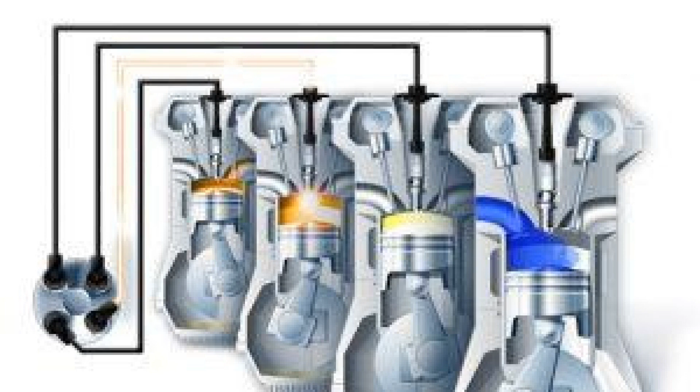Due to abnormal, i.e., early or late ignition of the fuel, the cylinder is subjected to a kind of explosion. But how do you set the ignition and avoid severe shock loads when the piston is somewhat displaced from the center, striking the cylinder walls? As a result of detonation, the edges and working plane of the valves, as a rule, melt and burn through. This phenomenon is closely related to the requirements of setting the ignition advance angle.

This means that in one revolution of the crankshaft, it is necessary to provide the spark so that the combustible mixture has time to burn completely. Combustion of a mixture, for example gasoline-air, occurs from the spark plug spark supplied to the combustion chamber.

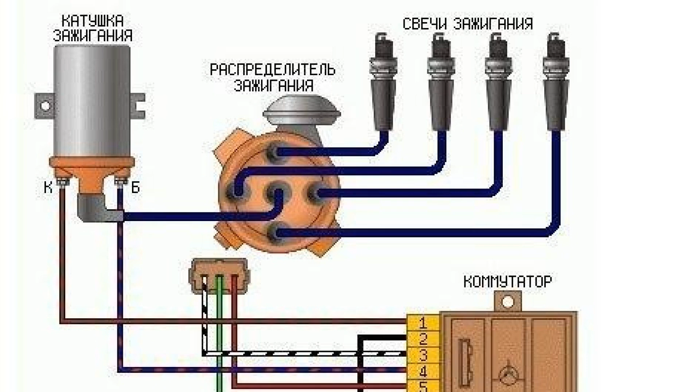This occurs at the moment when the piston reaches the compression stroke, i.e. TDC. The matter is the huge speed of rotation of the crankshaft. In an instant, the piston passes the way, pushing from the moment of ignition to move downward under the influence of burnt gases.

If ignition occurs when the piston reaches TDC, combustion will occur at the beginning of the stroke. This will cause the pressure of the gases to decrease. But if ignition occurs before it moves upward, there will be a counteraction to its movement.

System design: the ignition system is oriented to supply a spark discharge to the spark plugs in time with engine operation. There are variants of contactless and electronic systems, identical in the way of creating a pulse. To have a superficial notion of how to set the ignition, it is not unreasonable to know about its main elements: power source, battery, necessary for starting the engine, and the current generator to run the car.

The ignition switch, designed to supply voltage to the electrical system. Ignition coil, which converts the battery energy to 30,000 V, enough to create an electrical discharge between the electrodes of the spark plug. Spark plugs are a metal conductor with an outer insulation of heat-resistant porcelain. The second electrode is the threaded part of the plug.

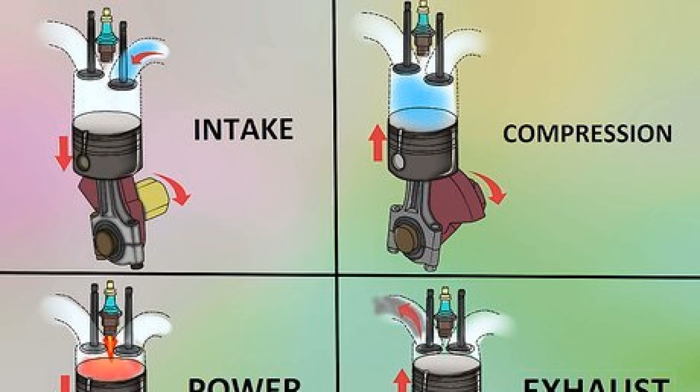It should be remembered that the ignition setting is the need to burn the fuel mixture without residue. This means that it must be fed and burned when the piston reaches TDC. Incorrect setting of the ignition timing is sure to lead to detonation of the cylinders with all the ensuing consequences.

The order of installation. The question arises: how do you set the ignition? So, we have learned that the ignition of the mixture should occur when the piston reaches TDC. This moment is determined by the position of the crankshaft.

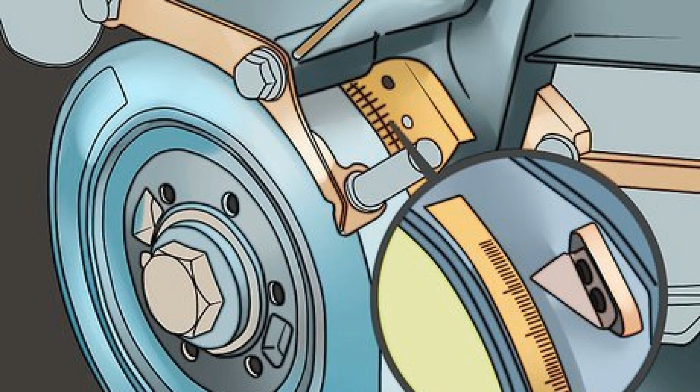We are talking about the position, in degrees, of the crankshaft relative to TDC. If there is an offset toward TDC, this position is called late ignition. Displacement towards BDC is called early ignition timing. The value of the latter directly depends on engine speed, so at high shaft speed, the early ignition timing is set.

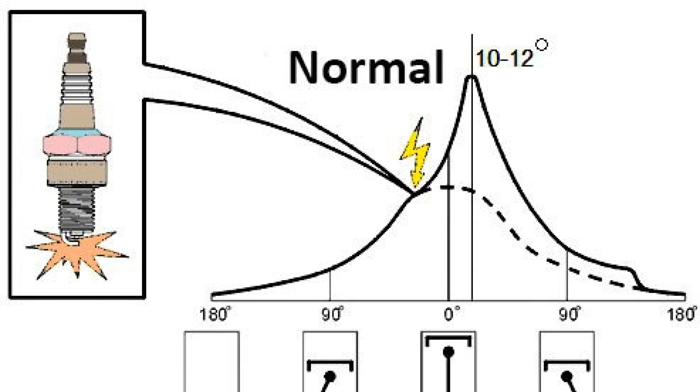The procedure for setting the ignition on a car is much simpler than its verbal explanation. Without going into subtleties, put the car, for example a VAZ2105, in neutral with the handbrake engaged. Remove the distributor breaker cover and rotor, then turn the crankshaft with a special wrench until the slider points to the first cylinder. Visually check the position of the factory marks and castings on the pulley and front cover - their coincidence is extremely important.

Before setting the ignition on your car, check the serviceability of the plugs, breaker contacts, and capacitor charge and discharge with a tester, as well as the ignition coil and its wires. Having confirmed the carburetor and vacuum unit are in good working order, you can begin setting the ignition.

For the VAZ2109 crankshaft marking, assume the rotor needs to be put back in place after repair. To do this, find cylinder one and align the marks on the crankshaft with the casting on the timing cover, by turning the crankshaft. This coincidence indicates the compression stroke. A plug inserted in the spark plug hole, used to check compression, will necessarily be pushed out.

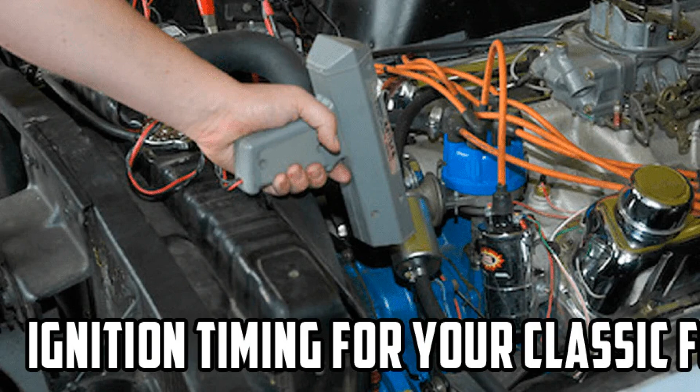Next, align the mark on the pulley with the longest mark on the cover. Install the rotor in the timing splines so that it points in the direction of cylinder one. Then, to turn the crankshaft, lift the rotor slightly and move it one spline clockwise. This is done to give the distributor its final adjustment.

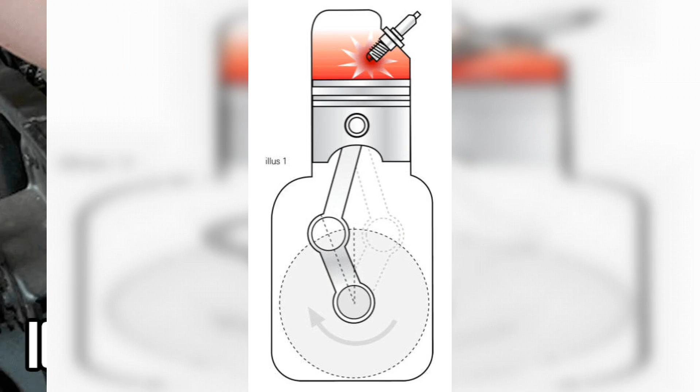The factory instruction manual is used to set the contact gap. If there is a gap between the marks, the rotor should be turned a few degrees to one side or the other. Remember: if the pulley mark has moved in the direction of crankshaft rotation, there is late ignition, and the rotor must be turned counterclockwise. If the mark on the pulley has fallen behind the casting on the cover, there is very early ignition - then turn the rotor clockwise by a certain number of degrees.

Setting the advance angle can also be done with an ordinary test lamp or a stroboscope, but that is another topic.

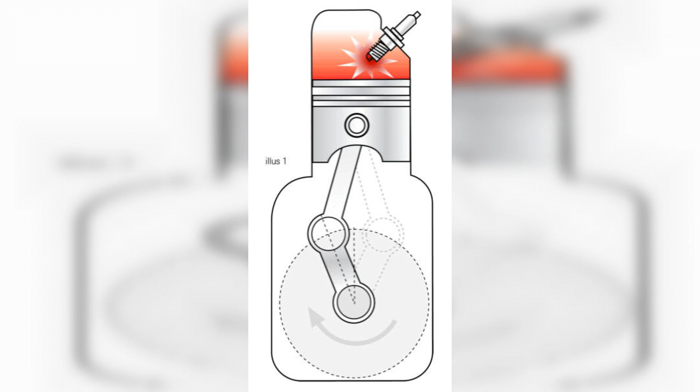To check the quality of the work and verify the ignition timing is correctly set, perform a test: accelerate the car to 40 km/h, then press the gas pedal and accelerate to 60 km/h or more while carefully listening to the engine. There may be a clanking sound indicating detonation. As speed increases further, the sound should stop - this may mean the system works normally, and the driver understands how to properly set the ignition on his car.

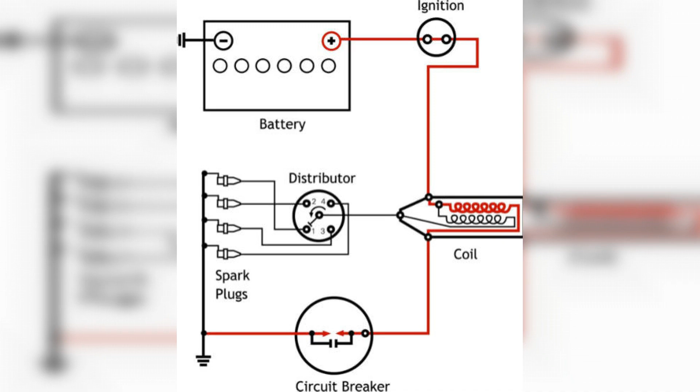In conclusion, setting the ignition timing correctly is crucial for optimal engine performance and efficiency. By following the steps outlined in this video, you can adjust the ignition timing yourself without needing a stroboscope, ensuring your engine runs smoothly and effectively. Remember, achieving the right timing helps eliminate issues related to premature or delayed ignition, ultimately enhancing your vehicle's overall performance.